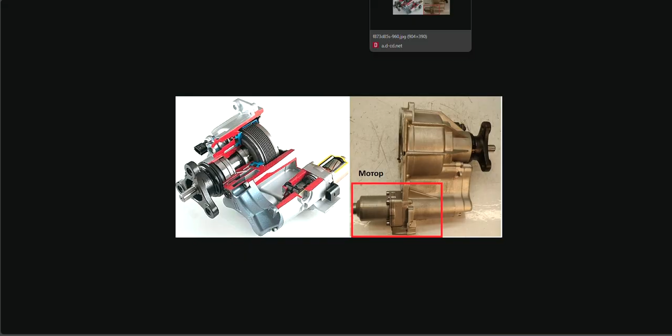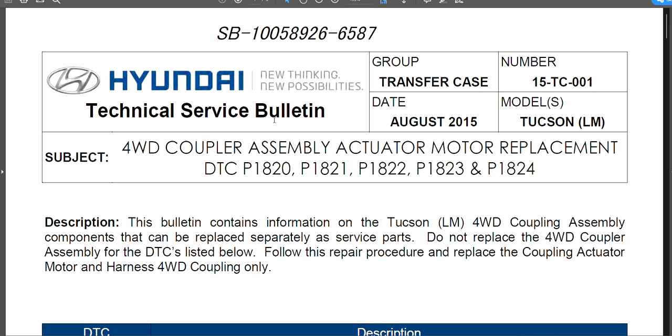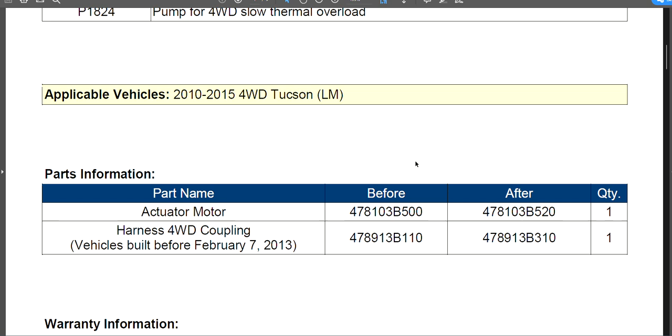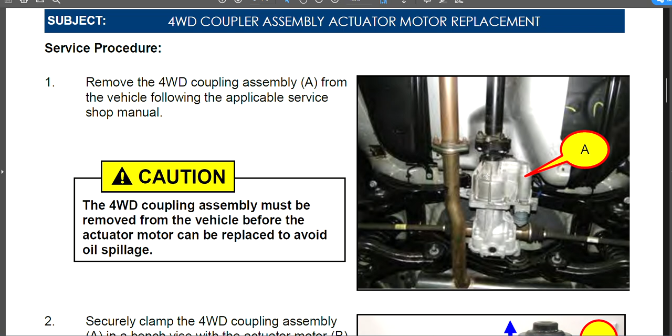I got the error code P1820, for which there is already a service bulletin on how to change it. So this is the DTC error P1820: pump four-wheel drive motor high over current detected. Well, I didn't apply the procedure exactly. As you can see here, the procedure says clearly that you should remove the coupling completely, then put it in the right upright position, and then remove the pump from it. This way you will not lose any oil.

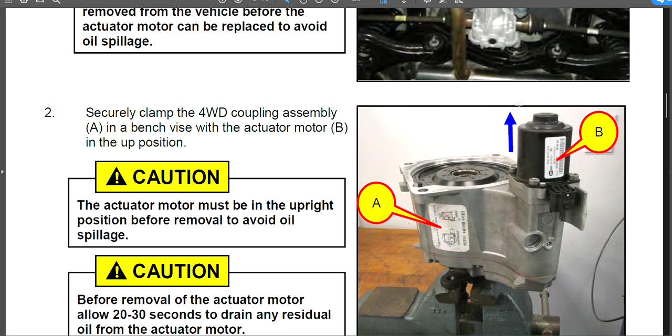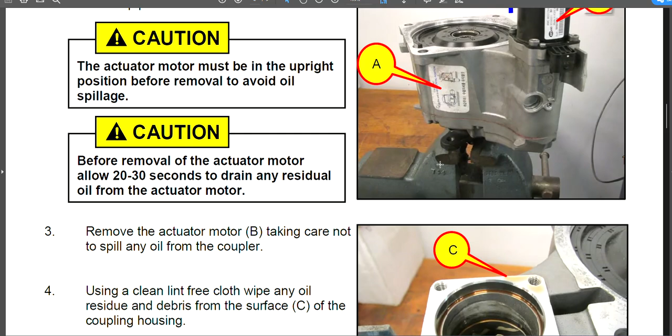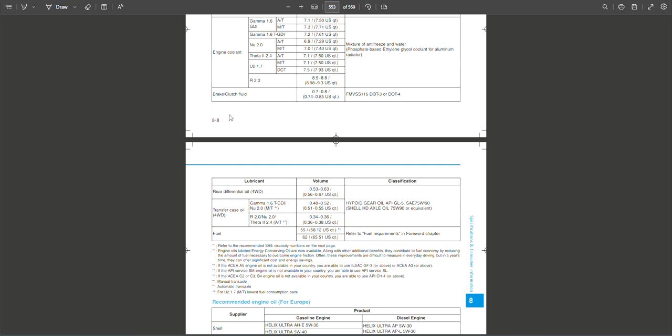So I didn't do this. I removed the pump completely, and a lot of fluid dropped out of the coupling assy, and this created a really big problem for me because nowhere is it stated which oil you have to put here. Even in the owner's manual, which I have here, there is brake fluid, oil, whatever, and there is the differential oil and the transfer case oil, which is 75W90, but this is not the case for the coupling assy.

The coupling assy is like a clutch. It uses an oil-based hydraulic fluid, let's call it like this. So I needed to do a lot of research. Here is a picture of the coupling assy in section, where you can see that if you remove this pump over here, the oil will drop through here. Of course, you have here an intake for the new oil, but nowhere is it stated which oil to use.

So I called the dealership and together with them started a discussion and some investigation based on the components to find the exact oil. And today I want to share with you how to change this oil and which oil to use.

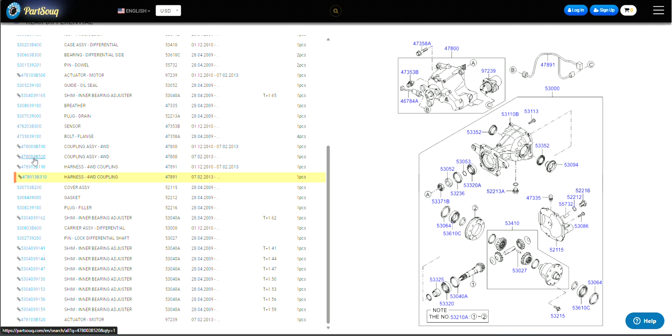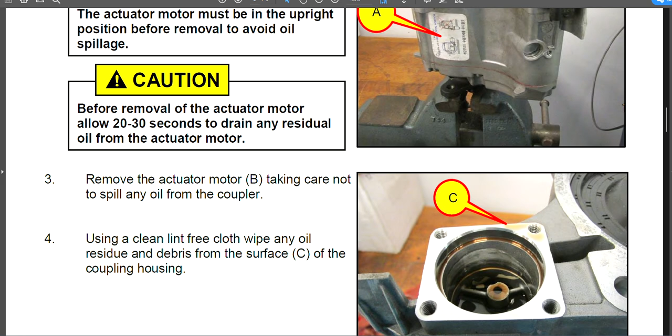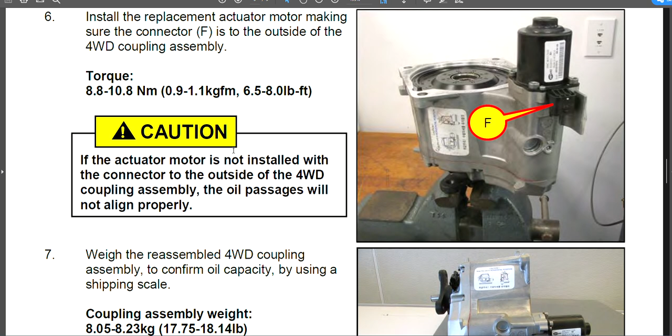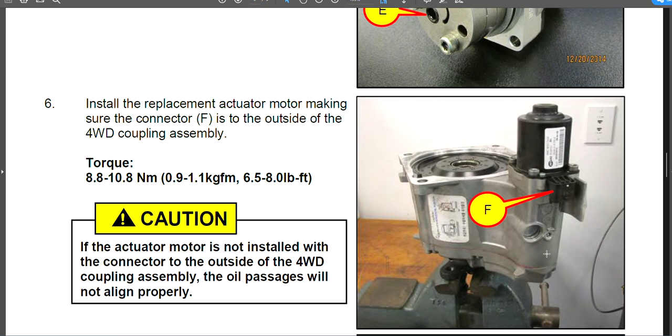One additional point here: coming back to the service bulletin, it states clearly, just one second to go down, that in case you drop more than 30 milliliters of oil, you have to change the entire assy. This is insane. So if you drop a little bit of oil, you have to change this assy completely, which is crazy expensive. As you can see here, it's about $1,200. It's insane, only for the oil.

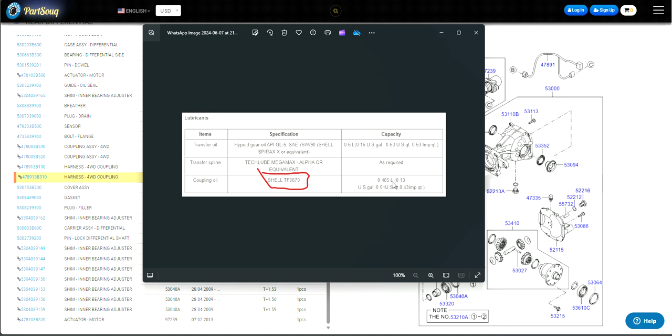So after research, I found out that the oil for the coupling assy is actually a Shell TF0870, and there's about half a liter, 485 milliliters of oil inside. I'm located in Romania, and here I found two different brands of oil. One is from Ravenol, the ATF transfer fluid DTF1, also used for BMW. As you can see here, it's stated also TF0870. So this is really good. You can use it, 1 liter is really enough, and it's not that expensive, only 20 euros.

Of course, there is an additional one from Febi Bilstein, which is the TF1, and here is the code 170367 that you can use. Also 1 liter; with half of this bottle you can manage to fill the entire coupling assy. Same pricing. And of course, there is the DTF1 original from BMW, but that one is more expensive, and it's actually the same oil as the Ravenol one.

So I hope this answered the question which oil to use in the coupling assy for Hyundai four-wheel drive cars. This applies also for Tucson, Santa Fe, Kona, or any car from the Kia or Hyundai brand, so also for the Kia Sportage and different types of Kia that have four-wheel drive. So if you are in the same situation as I am, you can buy this oil cheaply, add it to the coupling assy, and it will run perfectly fine. Okay, so I hope this answered your question.